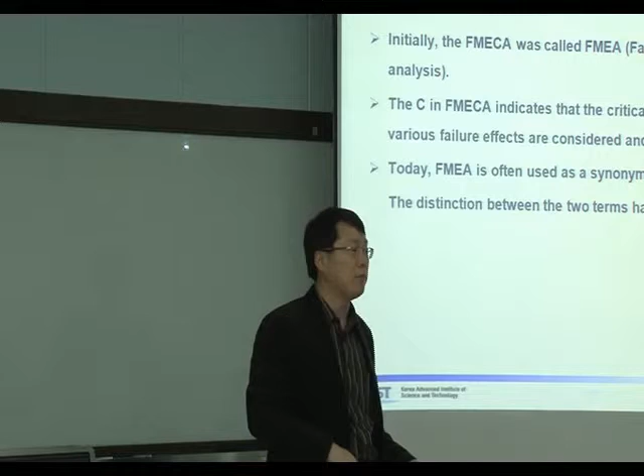There were many methods proposed for analyzing fault, failure mode, and effect. As you may remember, FMECA was proposed many years ago—to the best of my memory, around 1950. So it is really 60 years ago. FMECA survived the test of ages.

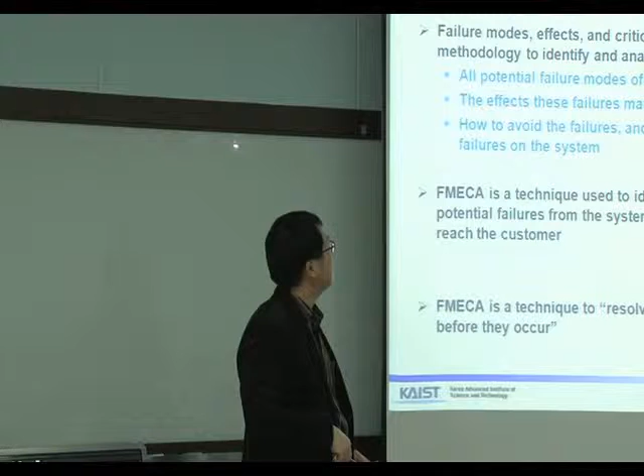FMECA is a methodology to identify and analyze all potential failure modes of the various parts of a system and the effects these failures may have on the system. How to avoid the failures, or mitigate their effect on the system, is the objective of FMECA.

There are many comments on FMECA, pros and cons. Mr. Omdahl is on the positive side: FMECA is a technique used to identify, prioritize, and eliminate potential failures from the system, design, or process before they reach the customer. Many engineers consider FMECA a technique to resolve potential problems in a system before they occur. So the first objective of FMECA is to identify the failure mode and analyze the effect, and the last objective is to determine what should be done to prevent the failure mode.

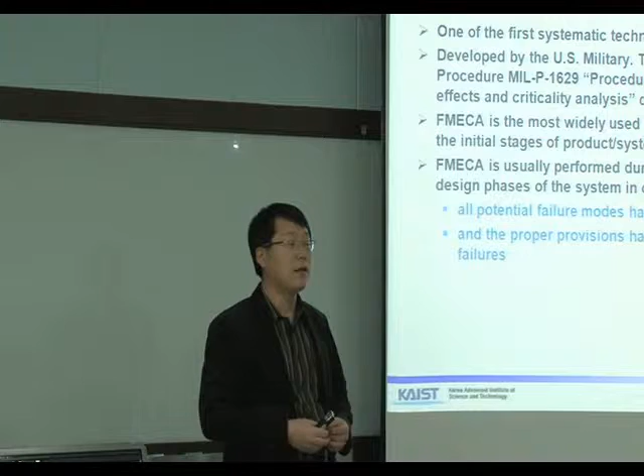This is the background of FMECA. FMECA is one of the first systematic techniques for system reliability analysis. It was developed by the U.S. military. It is not surprising that the defense industry was leading system reliability engineering in its early ages. The first guideline was a military procedure, MIL-P. When you see these three letters, MIL, that means Military Standard of the United States.

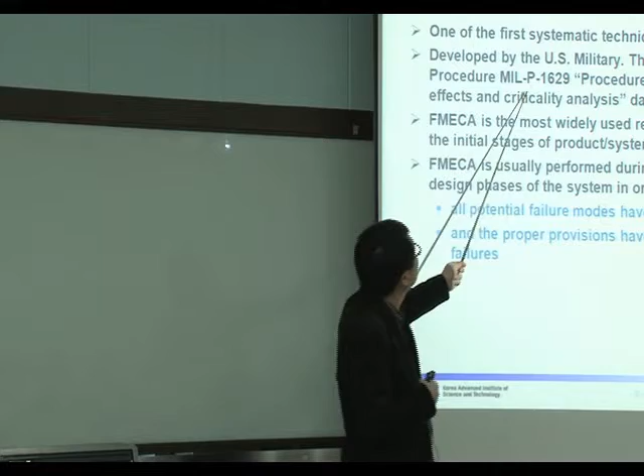MIL Standard P-1629: Procedure for Performing a Failure Mode, Effect, and Criticality Analysis. It was developed around the 1950s.

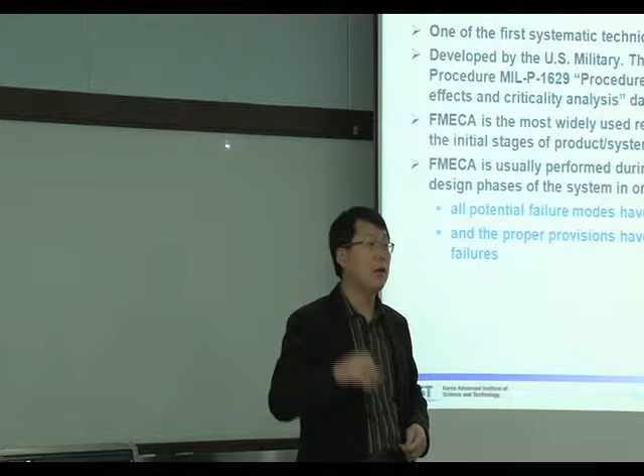FMECA is the most widely used reliability analysis technique in the initial stage of product system development. FMECA is usually performed during the conceptual and initial design phase of the system. Any system reliability analysis method can be applied to the design stage, the operation stage, or the detailed design stage. But you should remember that the value of system reliability analysis is highest in the design stage.

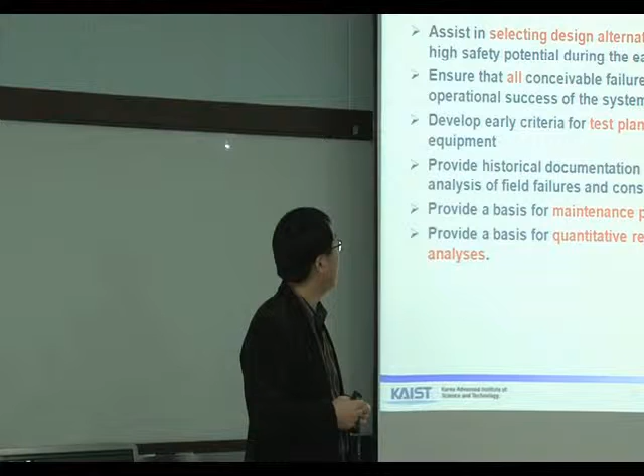That means we can identify the failure mode, then recognize which test should be conducted to remove the failure mode. It can also provide historical documentation for future reference, to aid in analysis of field failures and the consideration of design changes. That means, as I stressed at the beginning, you need full documentation to have qualification from the owner side.

So FMEA can provide good documentation, kind of an initiator of the documentation. It can provide a basis for maintenance planning, where we identify the failure mode and the countermeasures. Countermeasures can be a design change or an effective maintenance policy against the failure mode. So it provides the baseline for maintenance policy.

It can provide a basis for quantitative reliability and availability analysis. In order to quantitatively analyze system reliability, we need to know the logical connection of components and their failure rate. So FMEA can provide the first picture of a system configuration and the components involved, and it provides some first estimate of failure rate utilization.

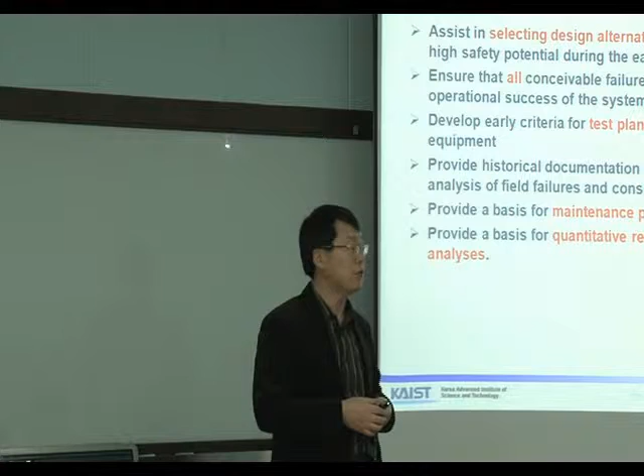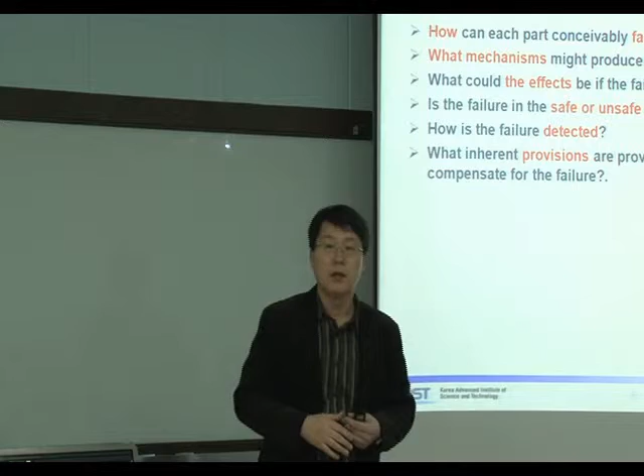Next question is, how is the failure detected? There are many detection methods. One is detection by operators - noise, vibrations, or color change. But these days, electric or electronic instruments are well developed, so we can put sensors to detect the failure, for example temperature measurement or thermocouples, pressure measurement or pressure transmitters, or flow meters.

Next is what inherent provisions are provided in the design to compensate for the failure. This is about the design change against the failure mode.

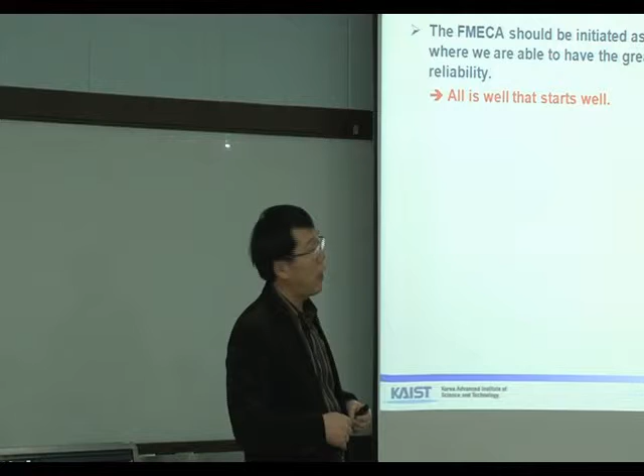Time of FMEA - when is the best time to apply FMEA? Let me repeat my emphasis: all is well that starts well. We usually believe in 'all is well that ends well,' in Korean, 끝이 좋으면 다 좋다. But in system reliability engineering, or in designing a complex system, you should keep in mind that all is well that starts well. So the complex system should be designed smart at every stage.

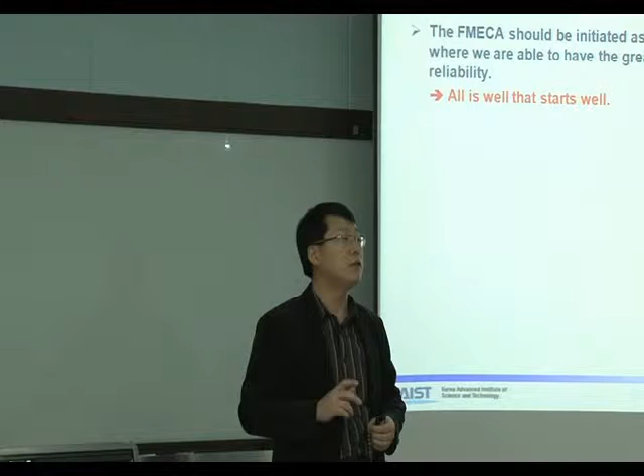In the later stage, you cannot change the design. What I mean is that the design change you may employ at a later stage cannot fix the problem the system intrinsically has.

These are types of FMEA. There are many kinds: design FMEA, process FMEA, and system FMEA. Their viewpoints and objectives are slightly different.

Design FMEA is carried out to eliminate failures during equipment design, taking into account all types of failure during the whole lifespan of the equipment. So we can say this design FMEA is the FMEA we usually refer to - it is the typical FMEA.

Another type is process FMEA, focused on problems stemming from how the equipment is manufactured, maintained, or operated. So process FMEA considers the manufacturing process, not the chemical process - it's about the manufacturing process.

Another type, system FMEA, looks for potential problems and bottlenecks in larger processes, such as entire production lines. So this is a kind of high-level FMEA. Design FMEA is the typical FMEA we consider when analyzing a target item or system.

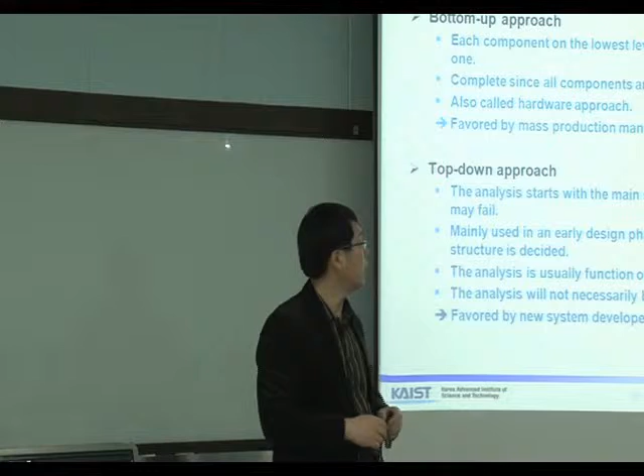There are two ways: bottom-up and top-down FMEA. As you may expect, the bottom-up approach starts with components and rises up, while the top-down approach is another way - we see the whole picture first, then break down the system. I don't know if we can distinguish the methods clearly, which is top-down and which is bottom-up, but typically I can say bottom-up FMEA is the typical approach taken in offshore plant design or any system design.

These are the standards of FMEA. First is the military standard of the United States. Second, IEC, the International Electrotechnical Commission, which is a kind of international standard. Third one is BS, the British Standard. And another one is SAE.

I guess it's the automobile standard, Society of Automotive Engineers. So it's the FMEA that is applied to cars. It is not surprising that car manufacturers are very good at FMEA.

Sematech. So there are several standards, but there is no significant difference between these standards.

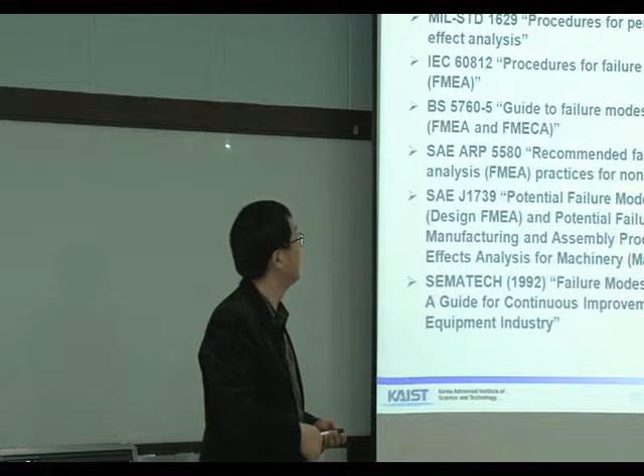From now on, I will show the steps of FMEA. There are 5 steps overall. First, FMEA prerequisite. Second, system structural analysis.

Third, doing FMEA. Step 4, team review - the team reviews the result of the FMEA. Fifth, the last step is corrective actions, meaning design change or change in maintenance policy. We should make a decision at the last stage.

The first step is prerequisite. That means we need to gather information about the system itself and related references. So the first step is we need to define the system boundary. The second is the mission of the system and its functions. You should keep in mind that failure is about the functional requirement.

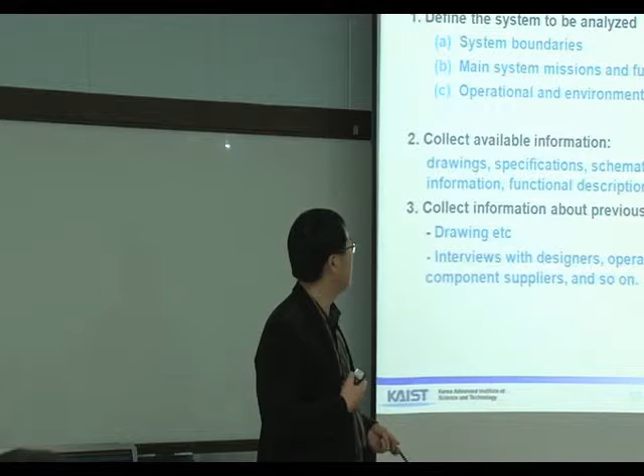Another thing is interviewing people involved in the previous design. There are many people who have similar experience to our system, so you should talk with the experienced people.

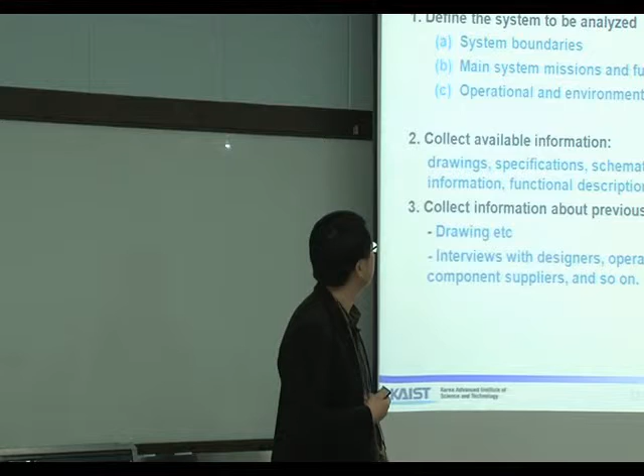Second step is the system structural analysis. So we divide the whole system. The question is, when should we stop dividing the system? For example, we can divide the whole car into several parts: engine, steering wheel, some control system, and so on.

Engine can be divided into pistons, fuel supply system, and so on. The piston itself can be divided, and the component of the piston can be further divided into each part. So at some point, at some extent, we should stop dividing the component. The question is, when should we stop dividing the system and the component?

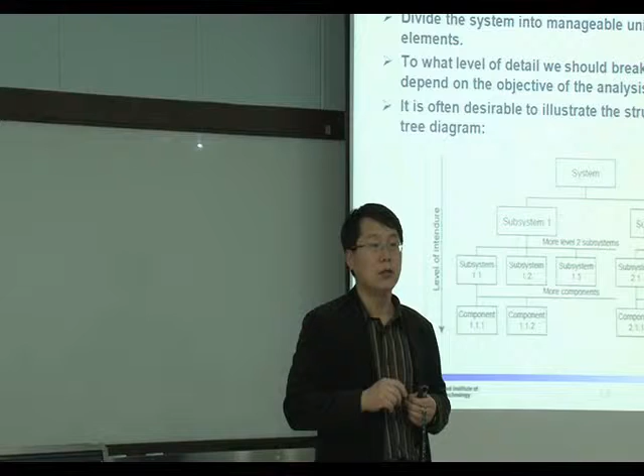If we change only the failed part of the pump, that component - the replaceable unit of the pump - is the manageable unit. So you should keep in mind when to stop dividing the system.

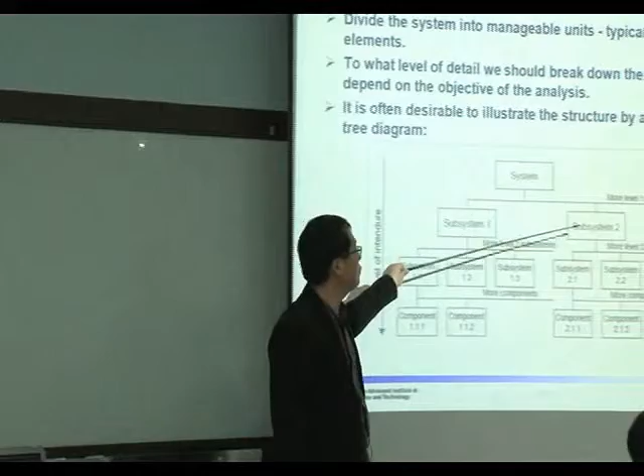So this is an example. The system is divided into subsystem 1 and 2. Subsystem 1 is divided into subsystem 1.1, subsystem 1.2, and so on. This subsystem can be broken down further, so you should decide which level is proper.

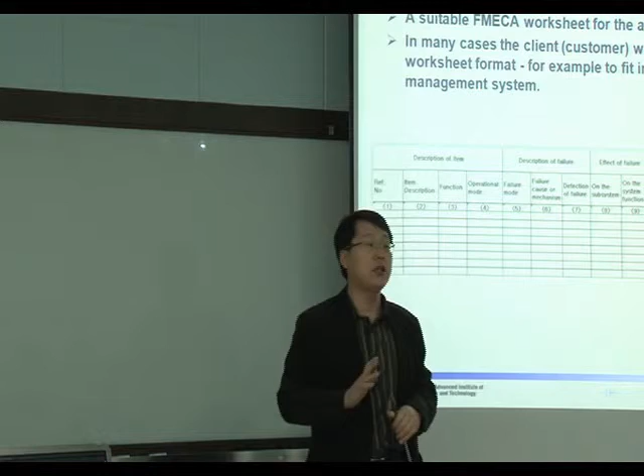And this is about how to carry out FMEA. Surprisingly, FMEA is a very simple method. What we should do is fill in the columns line by line, and let me explain column by column. Each owner has its own standard sheet, so there can be one more column, or the title of the column can be different, but the overall structure is the same for all FMEA standards.

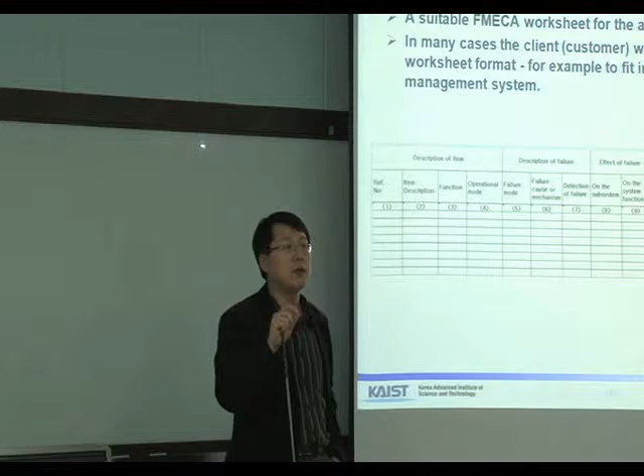This part is about description of the component, description of the manageable unit, reference number, the number of the component, item description, and its function.

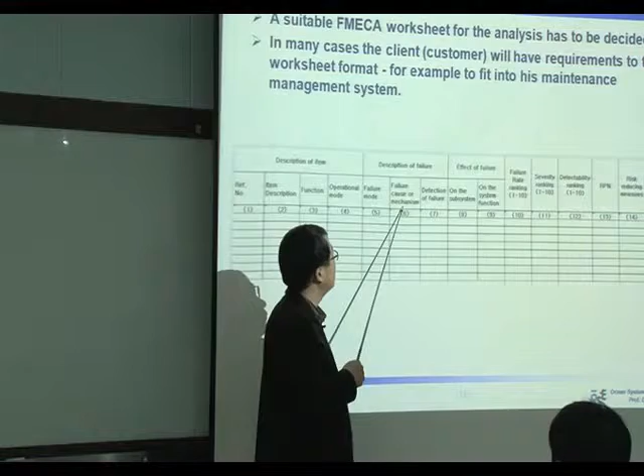We know that we should define function to define failure. Operational mode and these three columns are about description of failure: failure mode, failure cause or mechanism, detection of failure. This column is about effect of failure, the consequence of failure on the system, on the subsystem, on the system function. That means it's a partial influence, or it's the influence on the whole system, the total system.

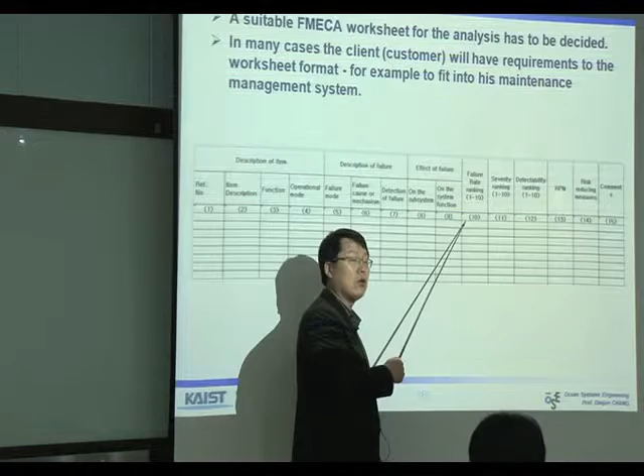Failure rate ranking, severity ranking, detectability ranking, RPN, risk reducing measures, comments. These are the columns we should fill in. So let me explain column by column in more detail.

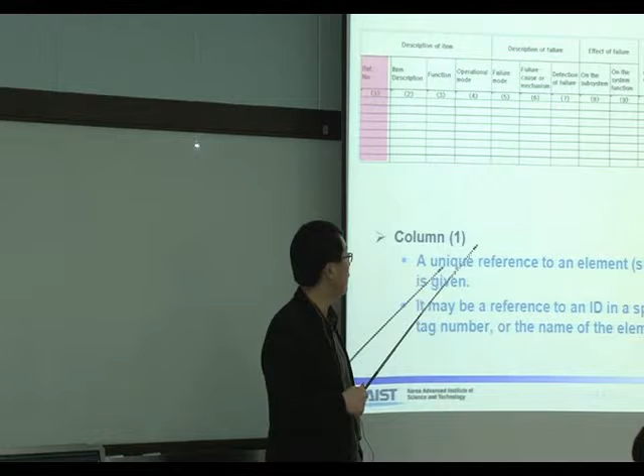Reference number, as you may expect, column 1, is a unique reference number given to an element, system or subsystem. It may be a reference to an ID in a specific drawing, or a so-called tag number, or the name of the element.

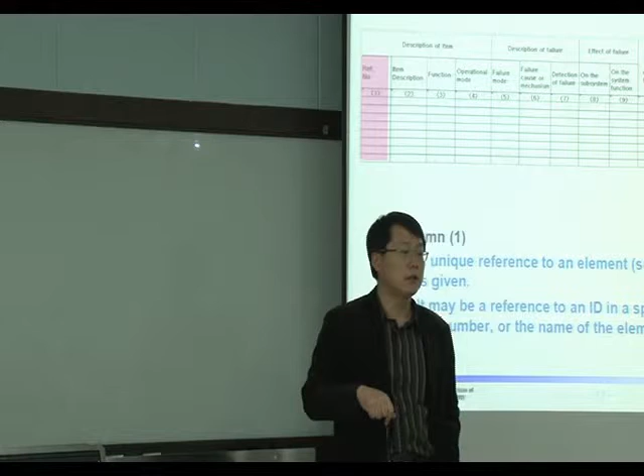So we usually put a number on a component, so it can systematically show where the component belongs. For example, if the P&ID has a tag number, a temperature element can be tagged TE, like this: TE104. Then if we see the tag number, it has a unique number like TE104, so we can interpret that the component is a temperature element.

One may be some equipment, for example evaporator. Four can be a serial number. There are several temperature elements, so this temperature element is the fourth one of the several temperature elements. So that's the number, that's how we number the component.

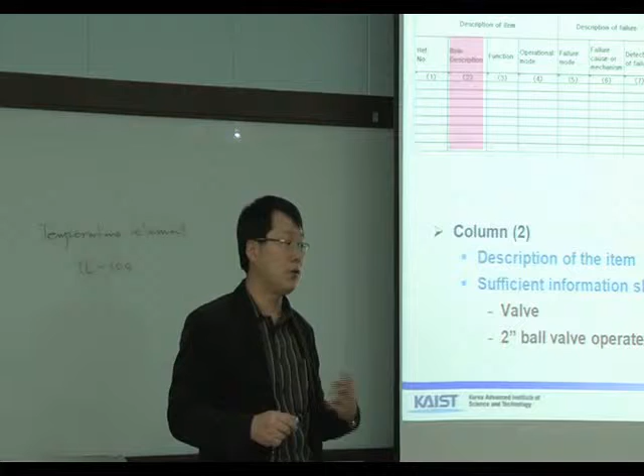Second one is about item description. Sometimes this kind of reference number is not familiar to managers. It can be familiar to engineers, but how about managers? Managers may have no idea about this number, so you'd better describe the item like valve.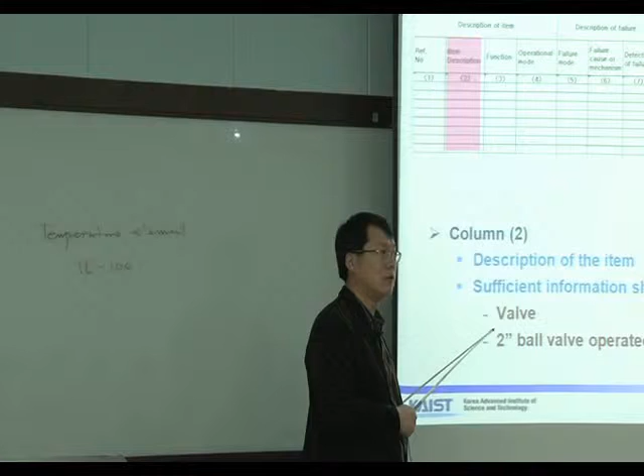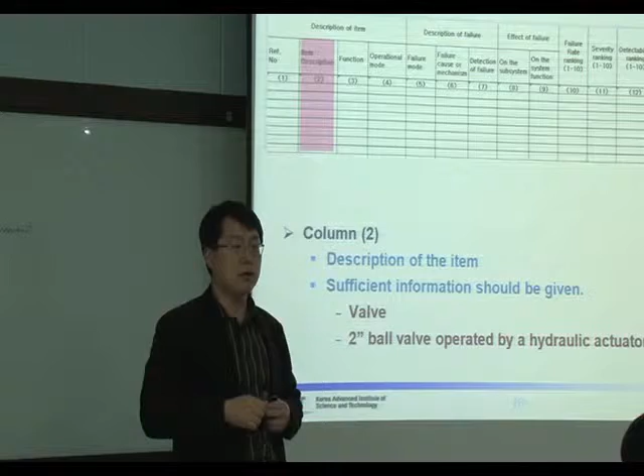But you should put sufficient information, like this: 2-inch ball valve operated by a hydraulic actuator. You should give sufficient information. Valve is not sufficient. 2-inch ball valve operated by hydraulic actuator gives more information about the valve.

Third one is the function. We should define the function of the element or the item. So you should list all the functions. You remember that an item or system may have several functions, so you should give at least all the essential functions of the item.

Sometimes the owner side or the standard provides a kind of check sheet, so it is a kind of reference sheet you can check. For example, for a valve, there can be several example functions, so we can choose the function. If you have built up some experience in FMEA, you don't need this kind of checklist. It is good for beginners.

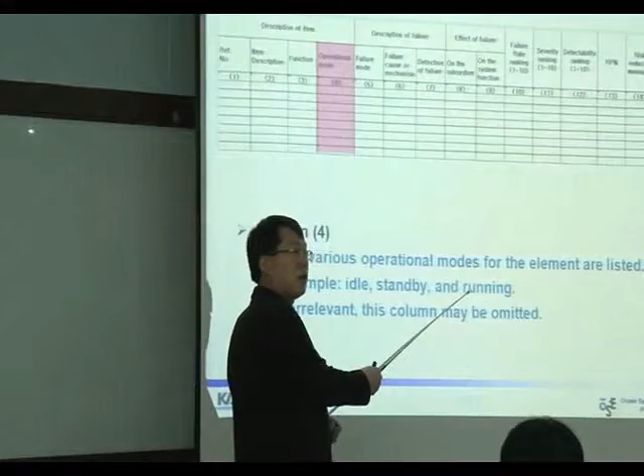Operational mode: the system has several operational modes. Typical operational mode is running, operating, but the system should at least have another operation mode like standby. Sometimes we should deal with idling operation mode, where the component is just waiting to be operated. So if the component has several operating modes, you should deal with all the operating modes.

Sometimes some operational modes are not relevant. We don't have to give consideration to that mode, then you can skip the operational mode.

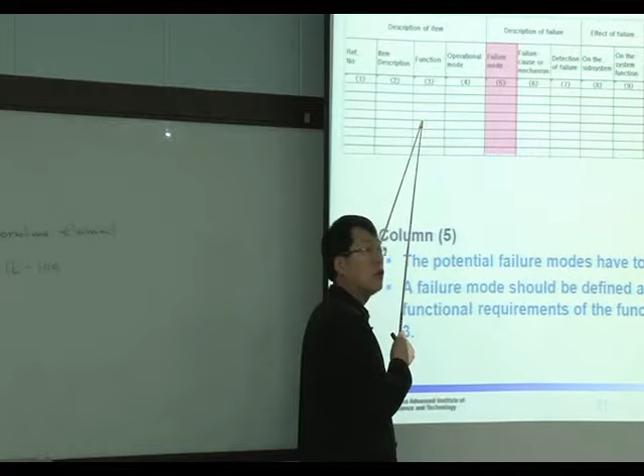Failure mode: the potential failure modes have to be identified and listed. A failure mode should be defined as a non-fulfillment of the functional requirement of the functions specified in column 3. So when you define failure mode, you always look at function. Failure should be defined only if the function is defined. So failure mode is a kind of way of observation of the failure, and the failure mode should be related with the function.

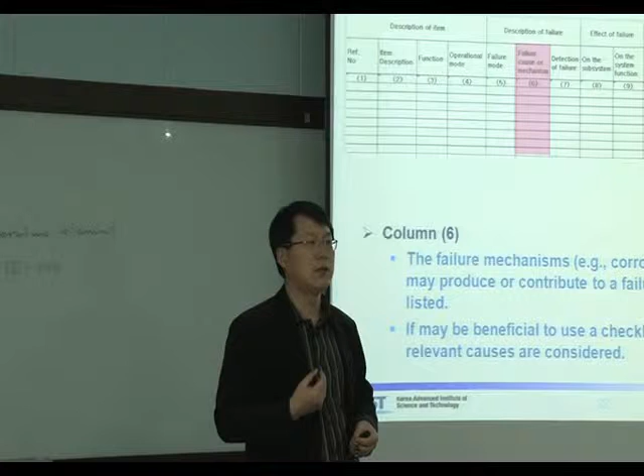Failure mechanism is the true reason of the failure, but it is kind of a guess. We don't know the true reason of the failure mode. Failure mode is kind of observation; failure mechanism is the hidden cause or hidden reason of the failure, so it is kind of just a guess of the failure mode.

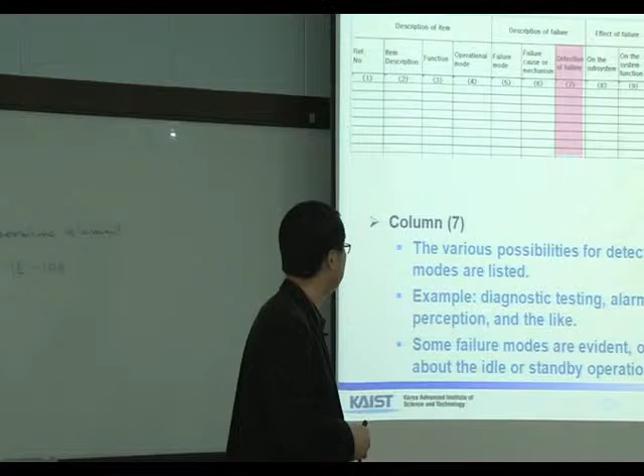Detection of failure: how to detect the failure? There can be some vibration sensor, temperature sensor, or operator identification if there is a failure or not. Diagnostic testing, alarms, proof testing, human perception, and the like. You know what human perception is? Hearing, sensing. Diagnostic testing is the test to detect the hidden failure.

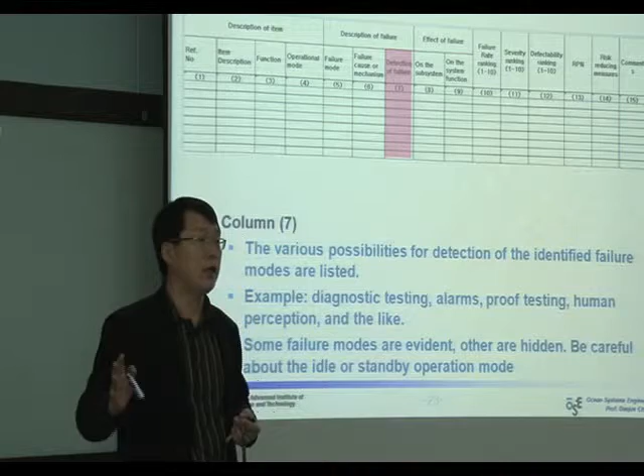You may remember the classification of failure: hidden failure, detectable failure, undetectable failure. So undetectable failure is sometimes detectable. Why? How? That is the diagnostic testing. For example, the failure of an airbag can be an undetectable failure, so diagnostic testing means we test the airbag directly, meaning a head-on collision. This is the extreme case of diagnostic testing.

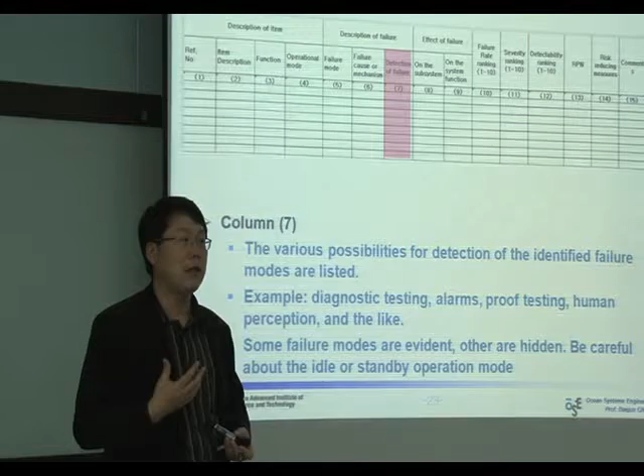In offshore plant design, we can carry out a kind of diagnostic testing in several ways. For example, if we have gas detectors, we don't know if the gas detectors are operating well, so we can release some sample gas. Then we can say if the gas detector is okay or failed. So you should remember that some failure modes are evident, others are hidden.

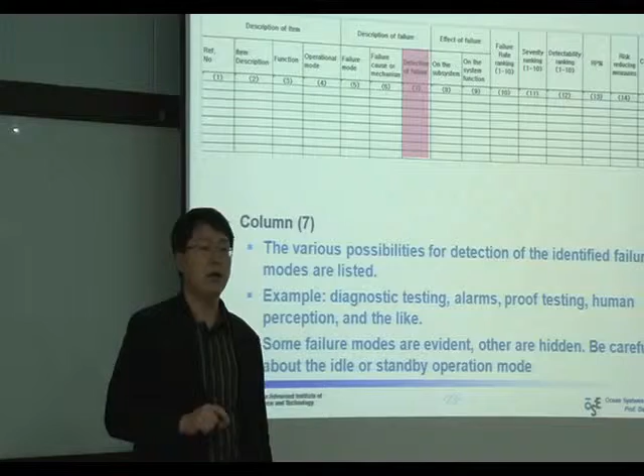If an item is in operating mode, it's very clear whether it is failed or not, because it is doing its function. But when the item is in idling or standby operation mode, sometimes it is very hard to identify the failure, whether the item is operating well or not.

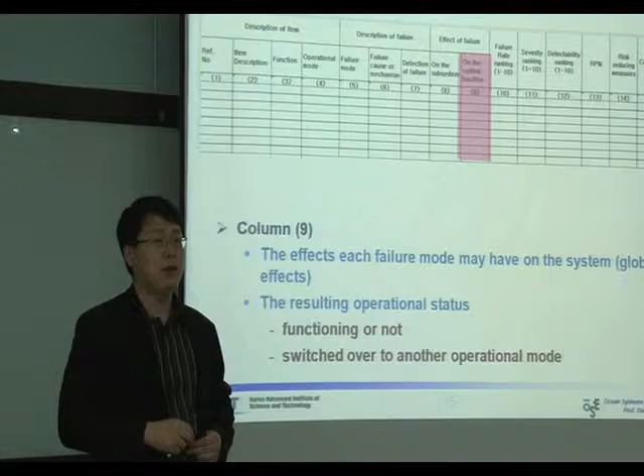This is about the effect of a failure. It's about the effect on the subsystem. The second column is about the effect on the whole system. So the effect of the failure of an item can be partial or local, but some failure can be catastrophic or can have impact on the whole system. Doing this, we can recognize which item is critical to the performance of the whole system.

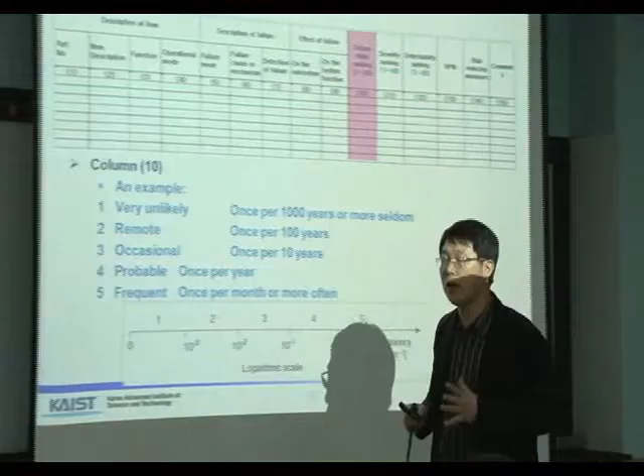Failure rate ranking, severity ranking, detectability ranking are kind of a qualitative estimate. If you carry out reliability analysis, you can estimate the precise value of the failure rate or mean time to repair. But when you are doing FMEA, possibly you are not an expert of reliability engineering, so you only have a kind of sense or magnitude of the failure rate, failure frequency, or the severity.

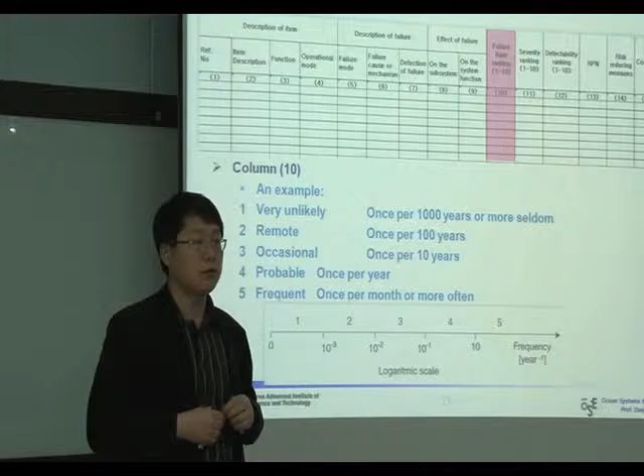For example, pump failure rate - how often does a pump fail annually? If you are good at reliability engineering, you can say that most oil pumps may fail 2 or 3 times per year. But even without that kind of expert judgment, we have a kind of feeling in daily life from our past experience. We have a sense of the failure rate of the pump. If you are a maintenance engineer, you know the rough estimate of the value. So this is about the sense, the magnitude.

So usually we define a 5 scale, sometimes a 10 scale. This shows a 10 scale, but from my experience, a 10 interval scale is too hard to distinguish. So I usually prefer the 5 range scale.

So this is what we are doing. If the failure rate is once per month or more, and if the pump seems to fail every month, then we rank it 5. If the pump fails once per 1,000 years, we rank it 1. Then how can you know? We just live about 100 years. Our professional career is about 10 to 20 years. How can you know the pump may fail once in 1,000 years?

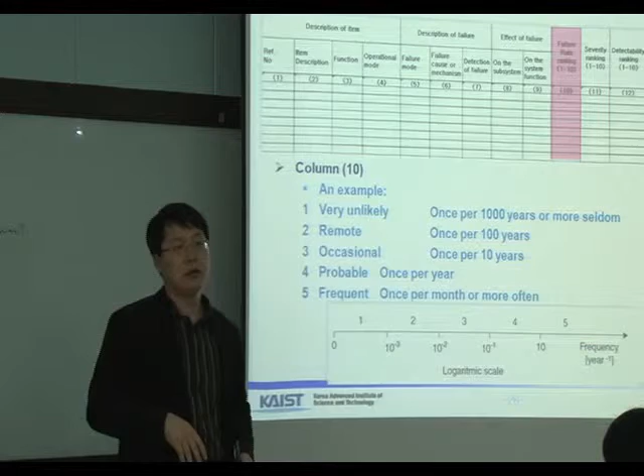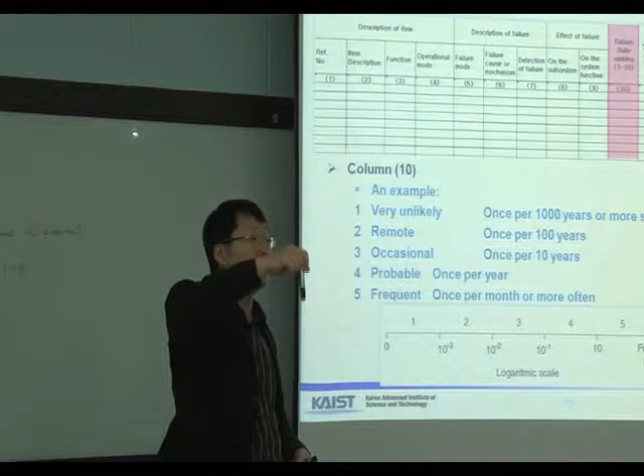This rank 4 is the failure rate for pumps, 1 or 2 times per year. Compressors have a higher failure rate, so 4 or 5. How about the valve? Maybe 5. The valve has vibrating actions - the valve stem is moving every second, so it is subject to higher failure frequency.

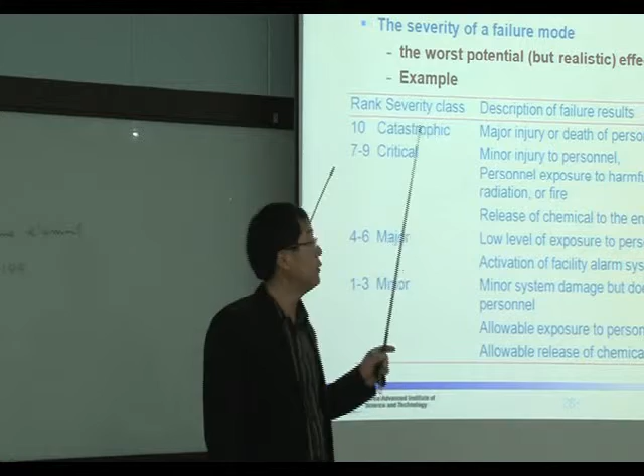Severity ranking is easier to sense than the failure rate, because now we define the failure and then estimate the impact of the failure. For example, rank 1 to 3 is given when the damage is minor. 10 is catastrophic, meaning several people can be killed. And 4 to 6 is kind of major damage.

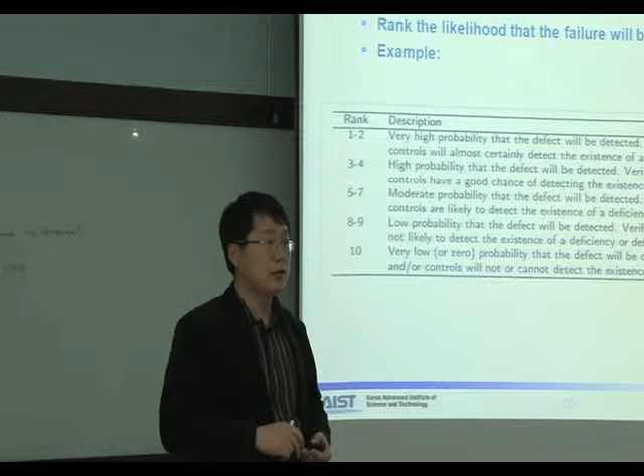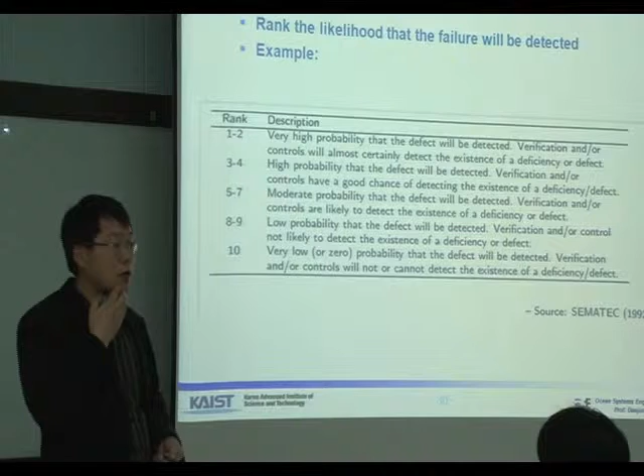Detectability is about the detection coverage. There is a failure, then what is the probability we can detect the failure? This is a kind of SEMATEC standard. So 1, 2 is very high probability that the failure can be detected. So the question is, what is the definition of very high probability? Sometimes it is very hard to define, so a frequent way is to set a kind of percentage range.

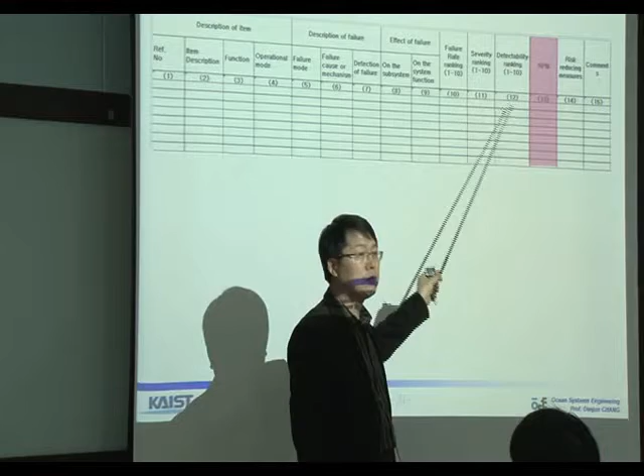RPN, risk priority number, is the product of S, O, D. What is SOD? Failure rate, severity, and detectability. So this column is just the product of the 3 columns. 5, 1, 1 means 5 times 1 times 1 is 5. So it's just the product of the 3 columns. Important thing is, the larger the worse.

So returning back to the 3 columns, we gave higher value for the higher failure rate. We gave higher severity ranking for the more severe impact, and we gave higher value when the probability of detection is low. So the larger, the worse. This is very important - when you set the rank, you should be careful to set the scales consistently.

So if all these 3 columns are 10 range scales, the RPN, the maximum value of RPN is 10 times 10 times 10, 1000. If you take a 5-5-5, the largest RPN is 125, 5 times 5 times 5.

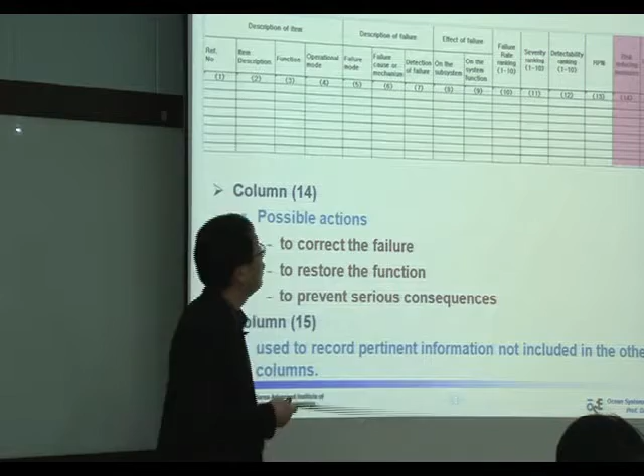risk reducing measures can be found from failure rate, severity, and detectability. What I mean is that one of your recommendations can be any way to reduce the failure rate, or to reduce the impact of the failure, or to improve the detectability.

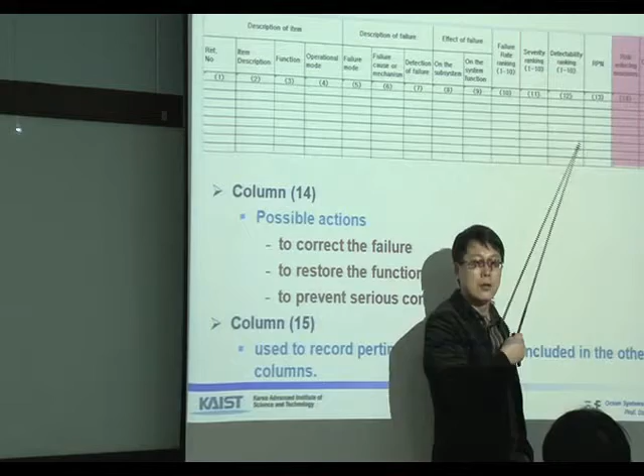Remarks are kind of some comments, some remarks. They should be recorded for future reference. Sometimes it is hard to reach an agreement. Then some participants of the FMEA meeting want to record something about that. Then we can put some comments for them.

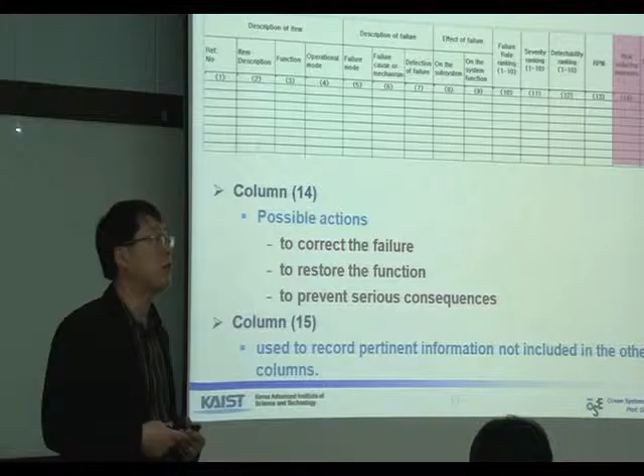So you should remember that this is kind of a simplified summary of the failure, so it can't be a cure-all. There can be some missing points, some insufficient explanation, so you can add some remark here.

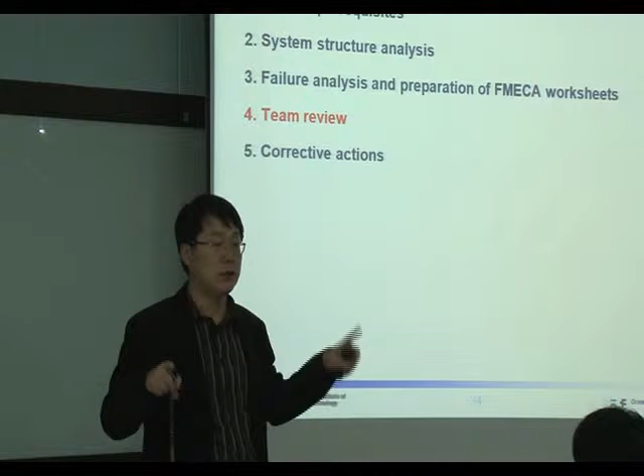I think for a simple system, we can spend 2 or 3 days to fill the sheet. Then we complete the sheet, the FMEA sheet. Then there is a team to review the sheet. So this is about the team review.

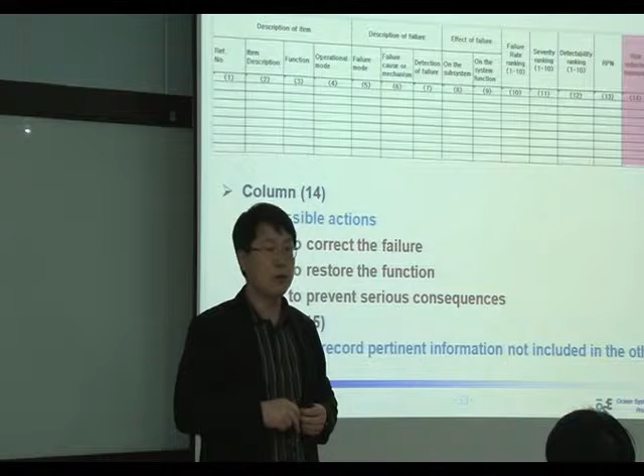The review team studies the FMEA worksheet and the risk matrix, or the risk priority number. So we are focused on RPN. What I mean is that RPN is the measure of the ranking of the failure, first, in combination of failure rate, detectability, and the impact. So the larger the RPN, the more severe the failure, the worse the failure.

So, for example, we have 1,000 items here. Should the team review all 1,000 line by line? No, we should focus on the lines with high RPN number.

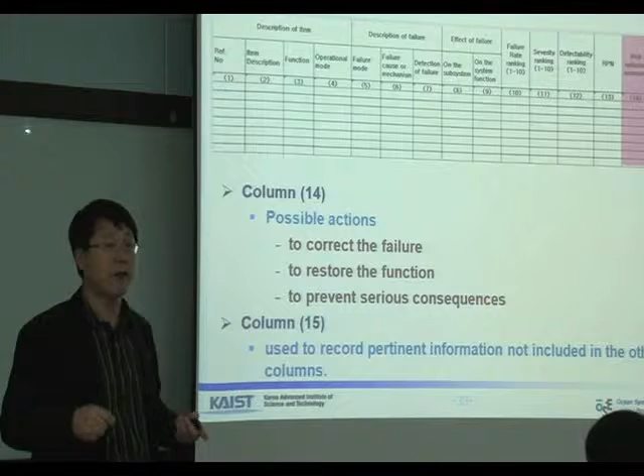Now you can know the drill, how it works. The team focuses on the RPN, high RPN, the items with high RPN numbers.

The main objective of the team review is to decide whether or not the system is acceptable. That means there are many items with high RPN number. Then the first question is, should we accept this system design? This is the first question. If there are too many items with high RPN number, that means the system design is bad in an overall sense.

Second is to identify feasible improvement of the system to reduce the risk. This may be achieved by reducing the frequency, reducing the impact or consequence, or improving the detectability.

So system risk analysis and safety engineering seems difficult sometimes, but if you divide the whole system, the whole structure, into components, sometimes the answer is very simple.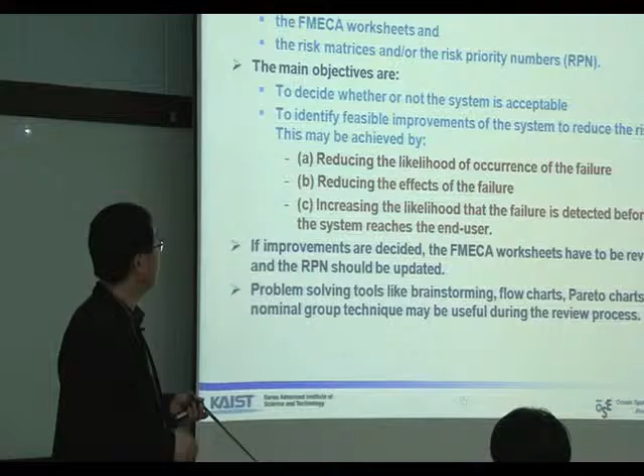If improvements are decided, the FMECA worksheet has to be revised and the RPN should be updated. I will show what this means. Problem solving tools like brainstorming, flowchart, Pareto chart, and the nominal group technique may be useful during the review process.

These are the participants in the team review. That means all the relevant persons should participate in the team review: project manager, design engineer, test engineer, reliability engineer, quality engineer, maintenance engineer, field service engineer, manufacturing engineer, safety engineer.

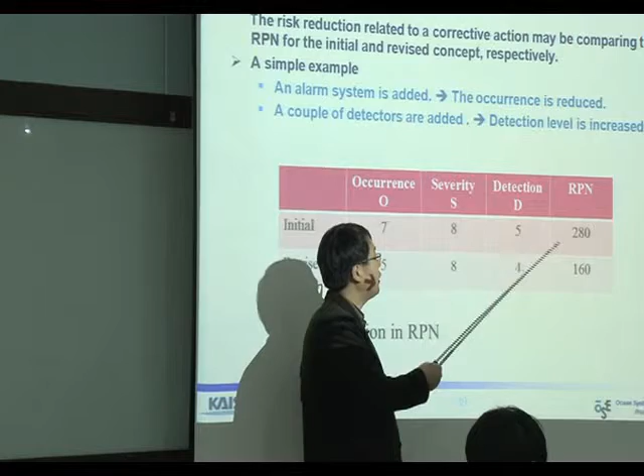Corrective actions. The sense of corrective actions is very simple. Let me give you an example. This is the RPN number we have. It's the initial design: 7, 8, 5. The RPN is just 7 times 8 times 5. It gives 280.

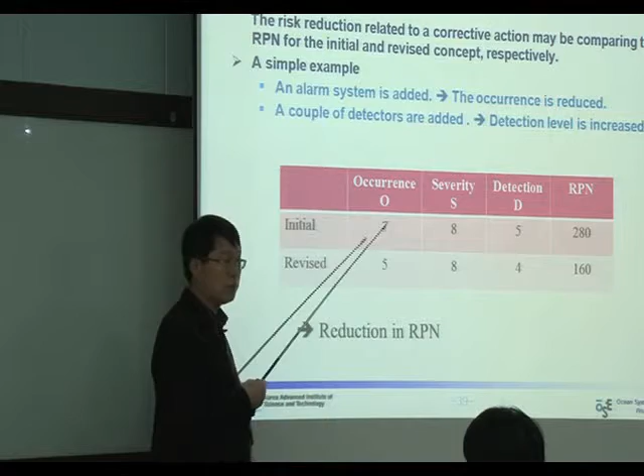So if we implement some action, one is about occurrence, the failure rate. We implement some countermeasures to reduce the failure rate. Then we can check, we can re-rank the failure rate. So the rank falls from 7 to 5.

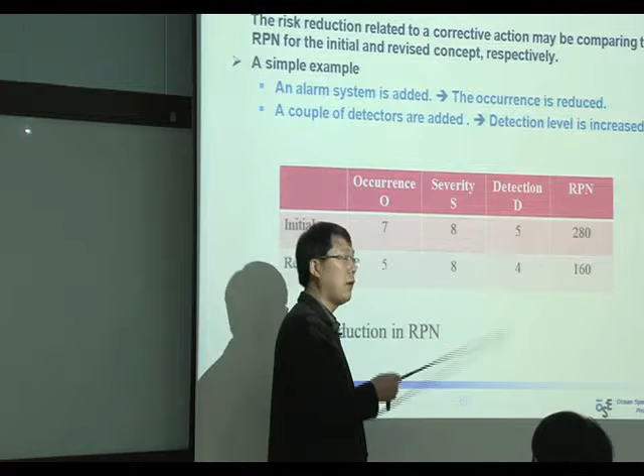We have no way to reduce the severity, the severity is the same for the two designs, but there is some way to improve the detectability, so detectability comes down by one step. So the revised design is 5 times 8 times 4, means 160. So that's the way we are doing it.

Make a decision for FMECA. So this is a kind of picture. You should always keep in mind, what is risk? Frequency times consequence. Don't hesitate. Risk is frequency times consequence. You should not forget this for the rest of your lifetime.

So, in order to reduce the risk, there are only two ways: one is to reduce frequency, the other is to reduce consequence. In FMECA, we consider another factor, detectability, so detectability is kind of a third component. So in order to reduce RPN, there are only 3 ways: reduce frequency, reduce consequence, or increase the detectability.

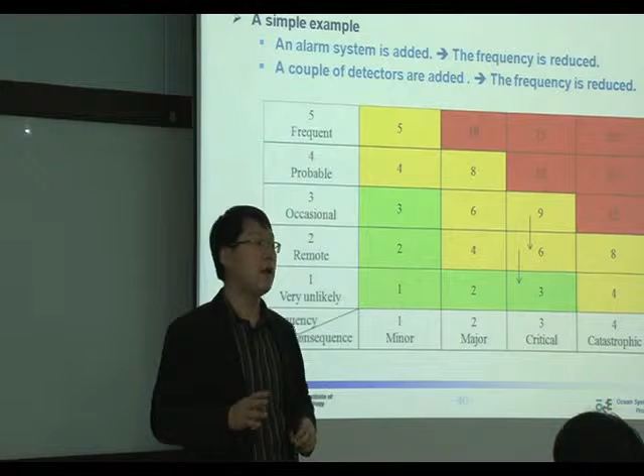People outside FMECA think that improvement of detectability is a kind of frequency mitigation action, but people inside FMECA think that the detectability should be separated from the frequency.

Pros and cons. Many people love FMECA because FMECA is a very structured and reliable method for evaluating hardware and systems. The concepts and applications are easy to learn, even by a novice. So I teach you about FMECA for 1 hour, then you can do FMECA.

How many people can carry out FMECA in Korea? Not that many, especially in the offshore industry. There can be many people in the automobile industry, but the number of people who can do FMECA in shipyards is very few. But if you learn FMECA for just one hour, you can do it.

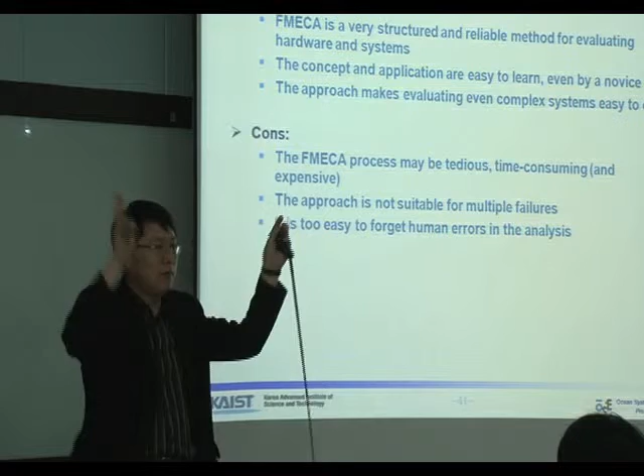The approach makes evaluating even complex systems easy to do. The concept is very simple. We divide the complex system into parts, then again into components, then we carry out the FMECA. We don't know the whole function or problems of the big system, but we know the problems with one component. That's the philosophy of FMECA.

There are many cons. The FMECA process may be tedious and time consuming, so on Friday you may know what I mean. The approach is not suitable for multiple failures, so it's kind of straightforward and cannot handle the variety of failures and functions. It is too easy to forget human errors in the analysis. The majority of accidents are caused by human errors, so we analyze the systems and the hardware, not the operators. So operators' wrongdoing is not analyzed by FMECA.

But as I told you, FMECA has survived about 60 years, and it was recognized as one of the most powerful system reliability analysis tools. FMECA, FTA (fault tree analysis), ETA (event tree analysis), and RBD (reliability block diagram) can be the most elementary methods for system reliability engineering. For system analysis, we can add hazard analysis. So I can say that 6 or 7 methods are the most popular in system engineering, and we'll learn all of them this semester.

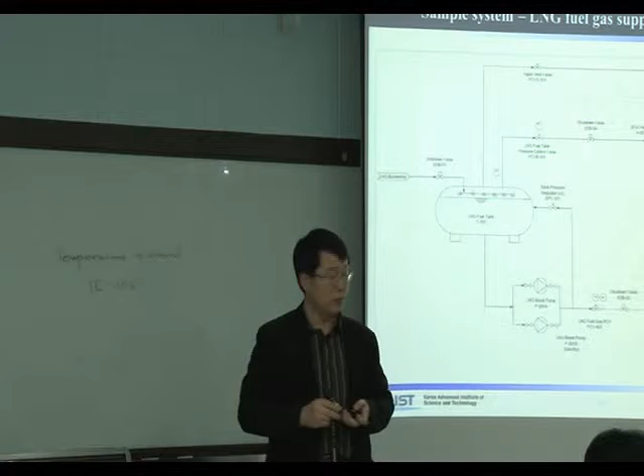As we know, there is a big mega trend, something happening in the shipping industry. Ship propulsion today is based on heavy fuel oil, and it generates many pollutant materials like SOx and NOx. These days CO2 is also considered a kind of pollutant material. One surprising fact is that ships consume 3% of the world's energy mix, but ships are consuming one of the dirtiest fuels in terms of sulfur content.

So there are three drivers for LNG shipping. One is regulation on fuel quality. Second is regulation on CO2 emission. These two regulations are already set to be implemented and will be enforced by IMO, the International Maritime Organization. The third is an economic reason: LNG is cheap.

So we need a kind of LNG fuel gas supply system for ships. But unfortunately, this is not the real system, there can be some design faults. Personally I'm doing some projects with industrial sectors, so I cannot show the real process diagram to you. So this is just an example. You should know that this is not the real design, this design is just an example, and it has some design faults.

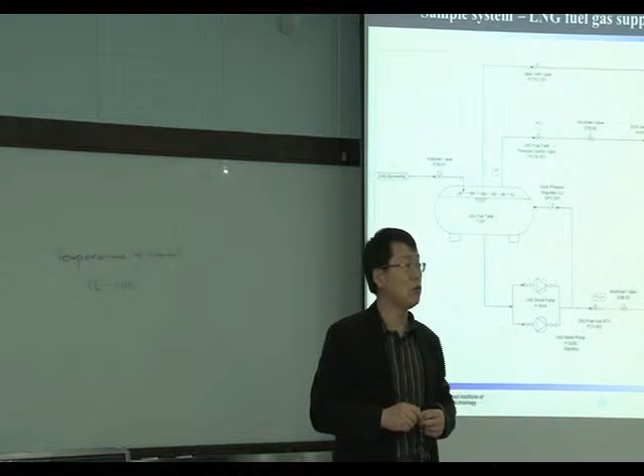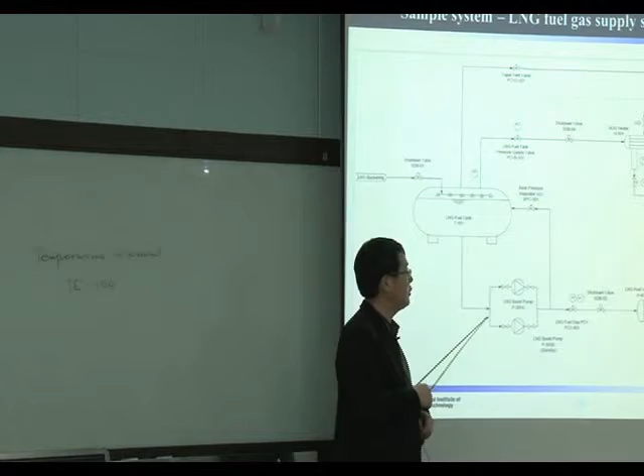Anyway, it is a good example for us to exercise FMECA this Friday. So you'd better give several minutes to see what this is about. The system is very simple. Here is LNG: it is pressurized by the pump and vaporized by the heat exchangers, then supplied to the engine.

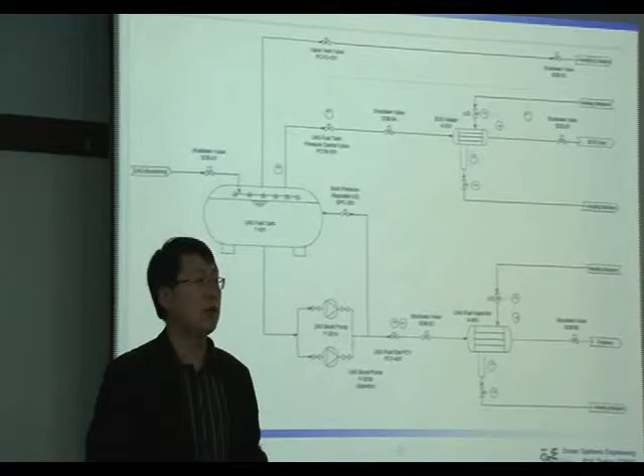Some of the gas should be vented for pressure protection. Since the temperature is around minus 160, this vapor should be heated and warmed up, and this can be used for the engine or boilers. This is the overall concept. So we will do the rest this Friday. Okay, that's all I prepared for today.